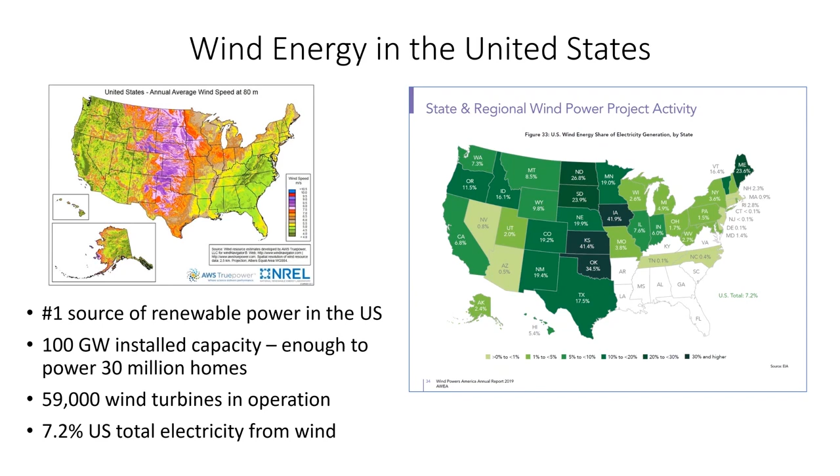The state has about 15,000 wind turbines. Again, that's a good number relative to the 60,000 that are in the country. And what is interesting is that we produce much more than the average. The average in the country is 7% electricity from wind, but this state is producing 17.5.

Something that is not well known, but is very important to mention, is that wind energy is good business for Texas. The state in particular receives almost $300 million in state and local taxes, which is a great source of revenue. And owners of land are receiving approximately $200 million in annual land lease payments from the wind projects. So bottom line is Texas is really king in wind, and if Texas were a country, it would be number 5 in the world in terms of installed capacity.

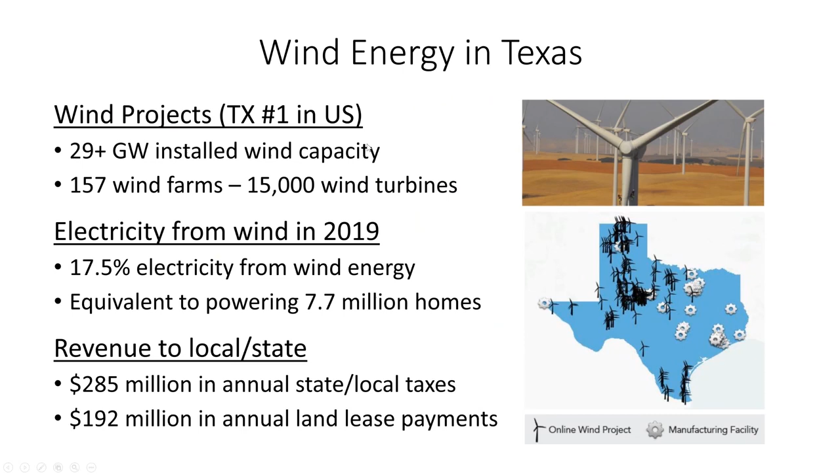So what are we doing at UTD, given the fact that we are in a state where wind is so important? Well, we have a group. We call ourselves the Center for Wind Energy at UTD, or UTD Wind, as one of my colleagues once suggested. And the goal of the work we do is very simple. The name of the game in research and development to support the growth of the wind industry is costs. The United States wants to get to 400 gigawatts, so 4 times what we have today, by 2030, with penetration levels of 30% or even more in the electric grid. So to do that, we need to continue working in order to lower the cost of wind energy.

And we do 2 things. We do research that is transformational, where we're trying to discover new concepts for the production of wind, the transmission of wind, the interaction of wind with the environment, and research that is more translational or applied research, where we take ideas that have been tried elsewhere or are known to be good, and we apply them to wind because they have not been applied before.

In terms of our mission, we want to put people together. The more the merrier. So we want to connect researchers in industry, in universities, with students in order to enable our activity. An important part: we are a university, so students are central to our mission, and we want to train the next generation of wind energy innovators. And everything requires collaboration. And collaboration also requires funding. So we want to establish private-public partnerships in order to enable our work.

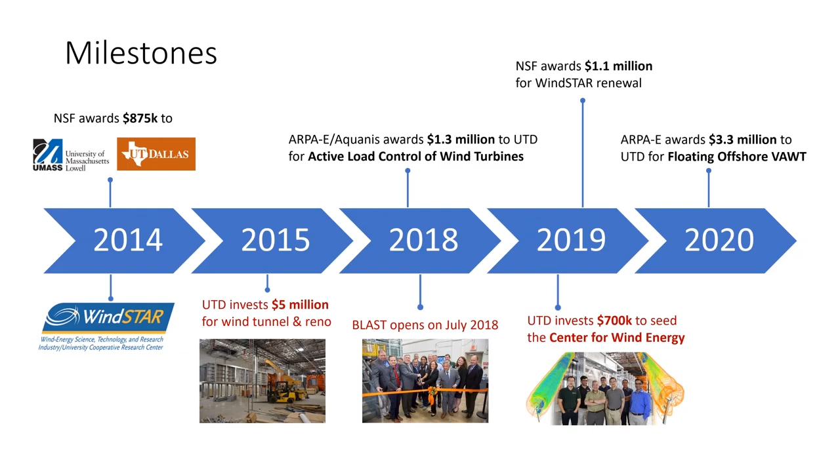The mission is to conduct research of significance and relevance to the wind power industry and produce their workforce at all levels. Leaders that could come with new innovations and contributors that can take some of the research that we do in WindSTAR to their companies. The entire concept of these centers is NSF gives us money for operations. That's why the grants from NSF are not huge. And then we are supposed to raise the funding for conducting projects from the member companies.

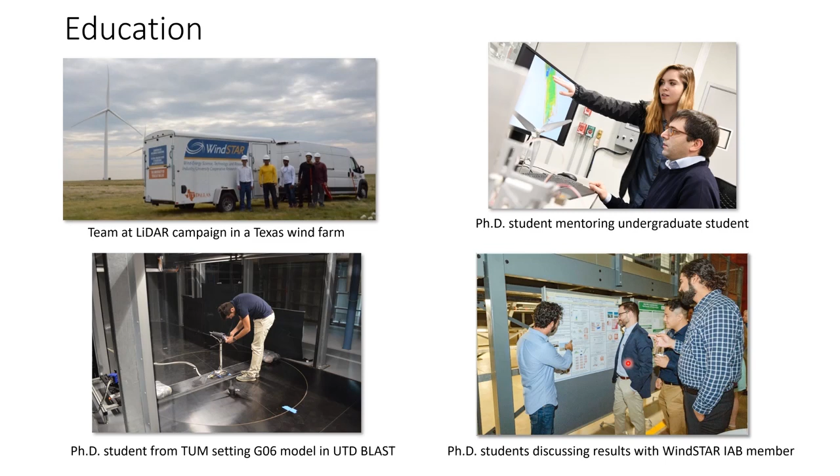On the bottom left, there is a student from the Technical University of Munich who came to our wind tunnel. This is his small wind turbine, the G06, and he came here to do some testing. On the right-hand side, you see interactions between graduate students and members of industry in our industry advisory board for WindSTAR talking to one another.

So facilities, what do we have? I mentioned the wind tunnel, and I again acknowledge the vision and support of David Daniel and Mark Spong to get this off the ground. It's phenomenal - there's only one wind tunnel like this, with a very long test section to create at scale the real conditions for the flow that wind farms see.

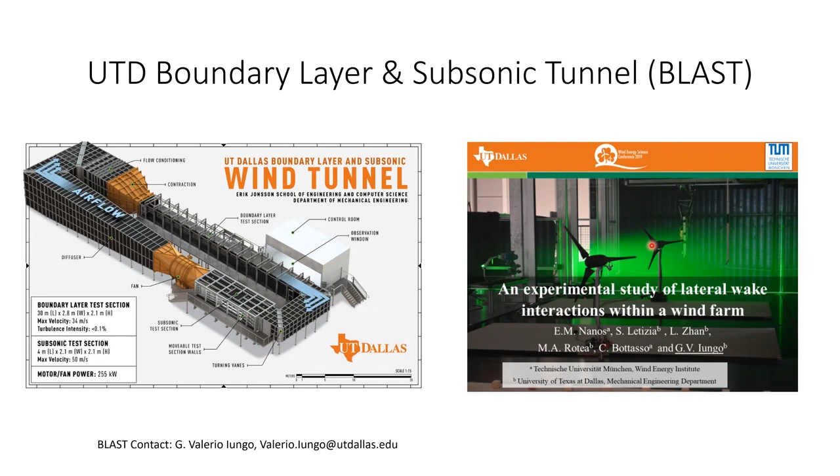On the right, you see the two turbines from Technical University of Munich with the first paper, I believe, that we did with them, making measurements of their wakes and their power production in BLAST. If you want to know more about this wind tunnel, you should contact Dr. Iungo.

And from there, diagnostics on the ability of a wind farm to produce power. Okay, so I've given you an overview of the center, facilities, people, and motivation for what we do, and some of you I know are students in this audience. So how about the research? Well, I'm going to pick a topic that I know, which is control of wind turbines, and describe some of the work that we have done in this area.

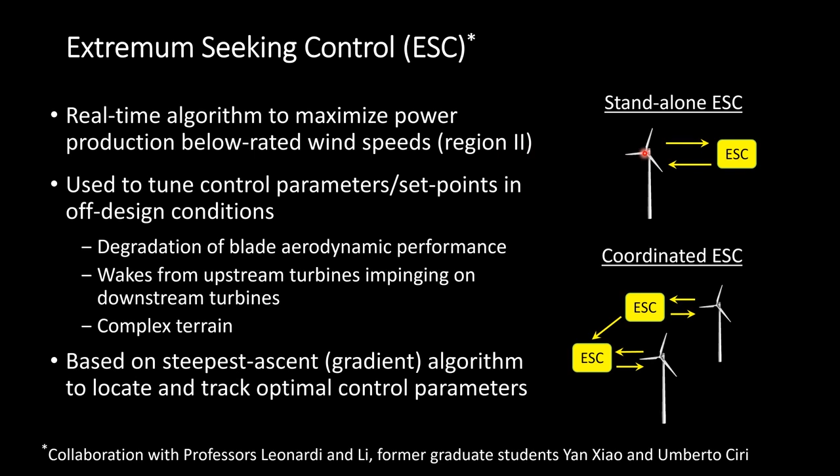This topic is extremum seeking control. Extremum seeking control is essentially an algorithm used to maximize power production in a particular region of operation of a wind turbine. It's called region 2. Region 2 is the wind speed range where the generator is running at an RPM and rotor speed that is not exceeding its rated value. How do we use this algorithm?

Well, it can be used in two modes. It can be used for a single wind turbine, or it can be used for a wind farm if we allow coordination of the different controllers for the different turbines. And what it does is continuously retune the machine so that it operates at its peak performance, and continuously retune a wind farm so that the turbines don't fight each other for the wind, but cooperate and collaborate in order to maximize the power they can extract together.

And here in the middle, you see some of the reasons why this may be needed. This is a simple algorithm. It's based on, if you know any optimization, the steepest ascent, the gradient algorithm, to find an optimal set of parameters.

If you don't know optimization, but you have done hiking: if you want to get to the top of the hill, you have to climb up. When you're at the top, if you want to go down, you have to climb down. So there is a slope up, slope down. When you're at the top, the slope is zero. So that's what extremum seeking does. It takes you to whatever peak value your power has for the particular conditions.

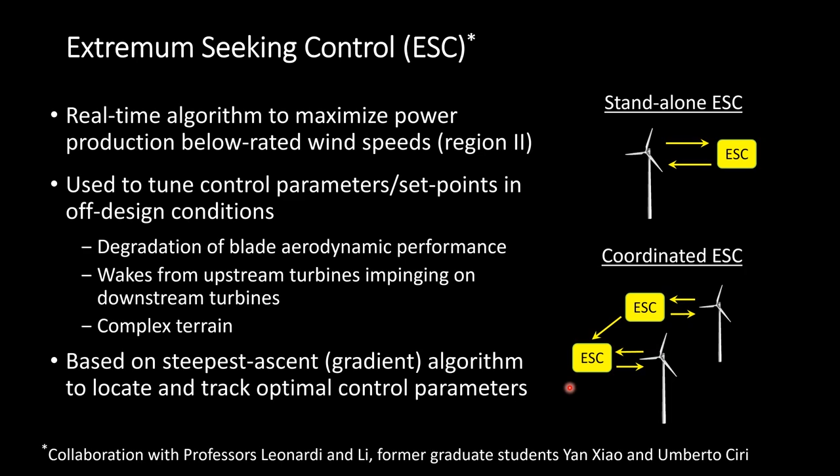So before I start with any controls, let's talk about how turbines operate. Basically, a wind turbine produces power when the wind is sufficiently high - we call that the cut-in speed - to move this massive rotor. Here you see a GE 3.6 megawatt machine in comparison to a Boeing 747. So you need enough energy in the wind to start the rotor.

And then if the wind is too high and you apply it to the rotor, you will lose it, so you shut down the machine. So you produce power between the cut-in and the cut-out wind speed. And the way power is produced in this region depends on how much wind you have.

There is a critical speed that we call the V-rated, the rated wind speed. At that speed and beyond, the power output is constant, and this is the rated power of the generator. You know, you buy a generator that is a 3.6 megawatt generator, the rated power is 3.6 megawatt. You buy one that is 2 megawatt, the rated power is 2 megawatts.

But below rated is where you depend a lot on the aerodynamics of the machine and where you want to maximize efficiency. So what is the power extracted by this machine when the speed of the wind is below rated conditions? Well, that power is essentially proportional to the power available in the wind. The proportionality factor is the efficiency, the aerodynamic efficiency of the machine. There's also an efficiency for the generator, but I'm going to just focus on the aerodynamic efficiency of the rotor.

So how is that done in a real machine? Well, in region 2, the machine is controlled by controlling the speed of the rotor. And the speed here, in the wind power community, we use this nomenclature that we call the tip speed ratio. Essentially, the tip speed ratio is the linear velocity of the tip of a blade - the angular velocity of the rotor times the length of the blade, the radius of the rotor - divided by the incoming wind speed V perpendicular to the rotor. We call that number lambda, and that's the tip speed ratio.

And now if you were to plot, for a typical turbine, the efficiency - the aerodynamic efficiency or the power coefficient of the machine - as a function of the tip speed ratio, you get this.

If the tip-speed ratio is very low, there is no power. If it's very high, there is also no power. There is a sweet spot. If you operate at that tip-speed ratio, you maximize your efficiency and get the most power for the given wind. So the name of the game with speed control is to keep operating at this star, the optimal tip-speed ratio.

In this case, this is a 5 megawatt turbine model from the National Renewable Energy Laboratory, and it has a 0.5 CP max at about 7.5 tip-speed ratio. These machines, I don't think there is one that has efficiency bigger than 50%, and there is actually a limit called the Betz limit that no one can exceed. But I'm going to skip the theoretical part.

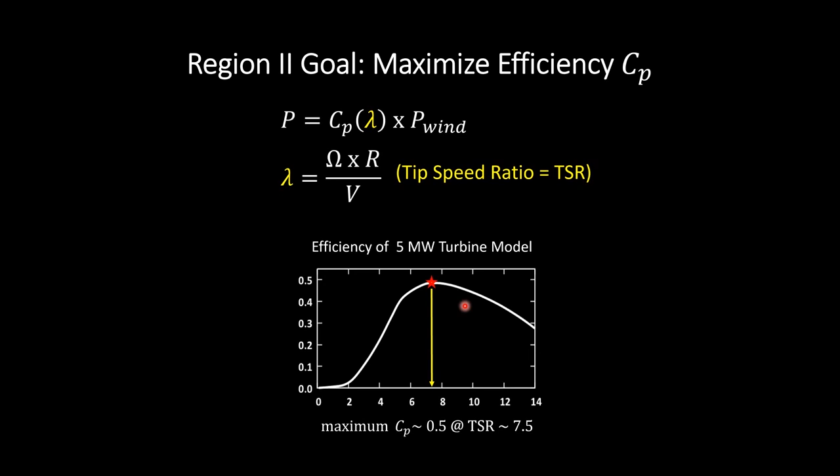So how do we control the machine to operate at the optimal tip-speed ratio? The optimal tip-speed ratio is right here at this star. On the left you see the TSR, and we said 7.5 was the optimum, and on the right is the power coefficient. I'm showing here the TSR and the power coefficient in yellow. You see that we hit the star at about 20 minutes using this basic algorithm called Extremum Seeking.

In this animation, which has the turbine and the time trace at the top, this is the turbine. When the colors are green, or darker, it's because the wind speed is low. When it's red, the wind speed is high. So we start accelerating the machine, and the wind speed behind it keeps decreasing, but the machine starts making more power.

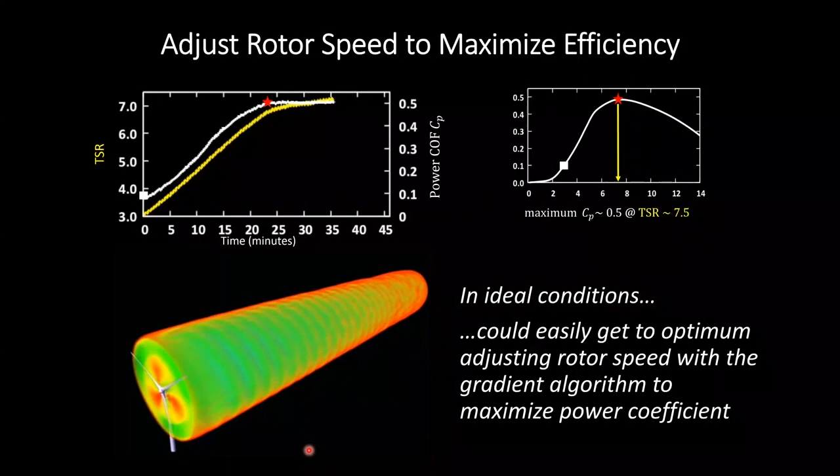So using Extremum Seeking under very ideal assumptions is quite easy. If we can adjust the rotor speed instantaneously and measure the power, with no turbulence, no noise in our measurement, no changes in wind direction, then this problem is easy to solve. But the reality is different.

And the reality does not allow us to control speed instantaneously. In your cars, you cannot change from 20 miles per hour to 60 miles per hour in no time. You need a force, a powertrain, a force actuator in order to achieve that. And here, what is used is the generator torque. The generator that is capturing power from the rotor and putting it into the grid requires a torque, and the reaction torque of the generator is applied to the rotor, acting as a sort of brake.

You can imagine a bicycle. You are at the top of the hill with brakes on the bicycle. You start speeding up, you want to reduce your speed, so you start touching the brakes. That's a reaction force that is slowing you down. So you can think of the generator torque as braking a bicycle.

It turns out that in order to operate at this point, at this optimal CP and given optimal TSR, you have to choose the generator torque as an appropriate function of the generator speed, the rotational speed omega g. That function is essentially a constant times the square of the generator speed. It could get more complicated than this, but this is the beginning.

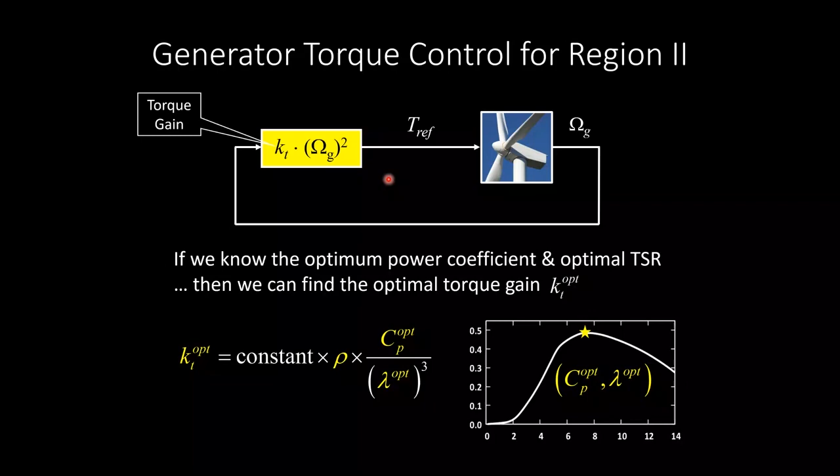So let's take a look at what could happen for a real wind turbine. You buy a wind turbine today, you put it in the field, and they are supposed to last 20 years. You go 2 years after you install it, maybe a year after installing it in Texas, and you start seeing that the blade has these insects, these bugs.

These bugs change the aerodynamic efficiency of the blade. You put wind turbines in Canada or in the northern plains in Minnesota, and you start seeing this: that's ice on the blades. That changes the aerodynamics. And if things are really bad, you could get erosion of the leading edge, and you basically have a blade that needs to be repaired.

But what do all these things do to your ability to extract power, essentially the aerodynamic efficiency called the power coefficient? So this is the operating point, you can think of it as the tip-speed ratio, though it could be some other parameter. You buy a new machine and operate on the blue curve. The manufacturer not only gives you a high value for your CP max, but also a flat curve, so that if your operating point changes a little to the left or right, you are still near optimal aerodynamic efficiency.

The problem is that for a new machine, when these effects take hold, this curve could become the curve in red. And if that were to happen, your optimum goes down, but not only does the optimum go down, the curve may get a lot sharper. So if you continue to operate here because you didn't know these changes took place, then instead of producing this amount of power, you'd be producing less.

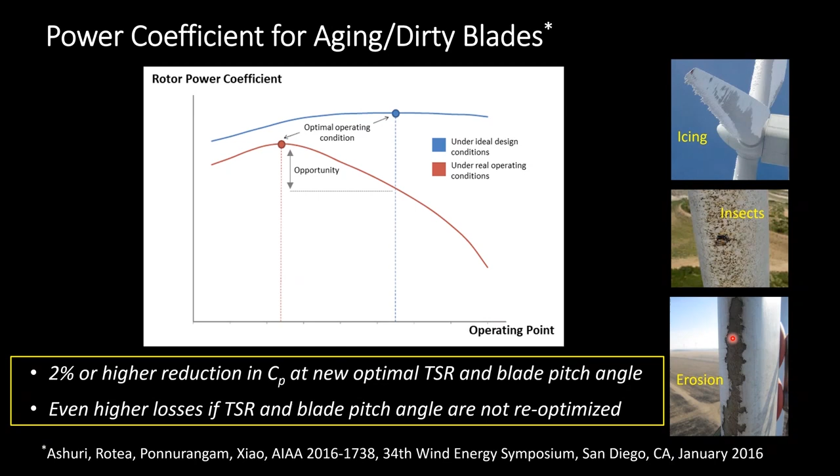In some cases, adjusting just the TSR is not enough. You may need to adjust also the so-called pitch angle, which is the angle the blade makes relative to the wind impinging on that aerodynamic surface. So bottom line is, if things change and you don't change your software, you're going to lose power and you're going to lose money. Our value proposition is: what changes can we do with software before things get so bad that you really need a hardware repair. Our answer is what we call extremum seeking control, where we make measurements of the rotor power,

then go through an algorithm that I'm not going to get into the details of. That algorithm can adjust two of the main parameters that control the aerodynamic efficiency of the blade: the torque gain KT that I mentioned earlier, and the blade pitch angle. The algorithm has some good properties—it doesn't require a lot of information to set up. In terms of measurement, we don't need to measure the wind. That's a big thing, because measuring the wind is not easy unless you're willing to pay a lot of money and get a LiDAR on the machine. This algorithm can be used to control the torque gain, the pitch angle, or both together.

I need to start accelerating here. So we did an implementation of this on an experimental machine owned by DOE at the National Renewable Energy Laboratory. It's called CART3, shown here. This is a 600-700 kilowatt machine, fully instrumented in order to do control studies.

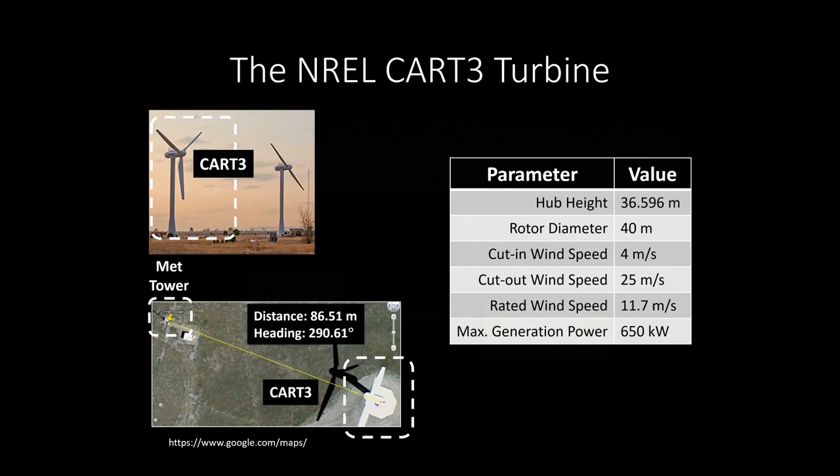And when we did the test, we applied our algorithm to a baseline controller that was set. This machine has an optimal CP, calculated under a number of assumptions, of 0.47. We started with a controller that the machine had, producing an approximation of the power coefficient—essentially the power produced by the turbine divided by the power available in the wind—that was 0.38. Then we let that machine run, we applied our ESC, and we increased the power coefficient, the estimated power coefficient, to 0.42. So that's a 12% improvement.

We did the same for the pitch angle, which is the angle these blades make relative to the wind. We took it from a baseline of 0.32 to 0.35, which is an 8% improvement. The difference in improvement had to do with several factors, one of them being that the torque gain experiment was done in the summer—no ice, nothing funny on the blades, maybe some bugs but not that many. In the winter, there was some ice on the blades, which changed the aerodynamic properties. So we published this work.

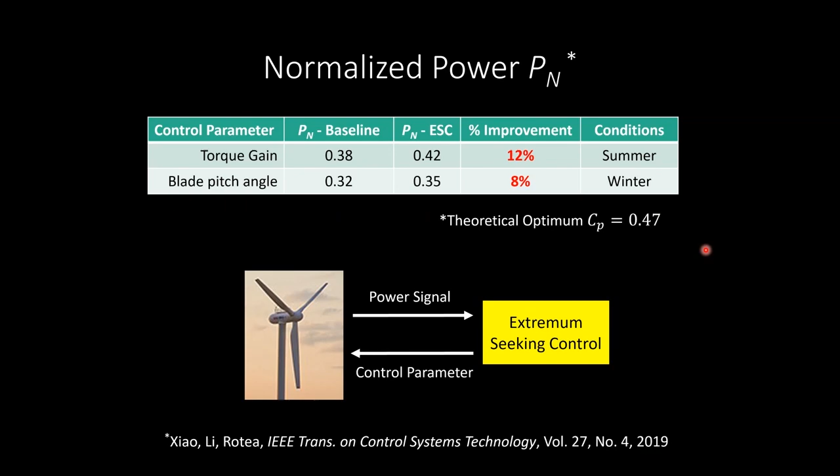In terms of improvement and impact, we have learned that ESC can improve power production. This experiment had a limited amount of data, and with the data we had, we were able to do some statistics, and we can say with 90% confidence that our improvement is going to be at least 3 to 4%. We may not get 8, we may not get 12, but we should have some confidence that we can get at least 3. Of course, more testing is needed, but these results were encouraging.

And why is this important? Well, we talked to people in industry. These numbers are a little dated now, they could have changed, but we were told by members of the Industrial Advisory Board of our center that a 1% increase in annual energy production for a wind turbine could translate into an increase of revenue between $3,000 and $5,000 per year per machine.

So if you take these numbers, you assume a 2% increase in AEP by applying this ESC, and you do this as a retrofit to roughly 20% of the 60,000 turbines in the country, you're going to have an extra revenue between $72 million and $120 million. So that is very promising, very encouraging, and we should do this algorithm more and more.

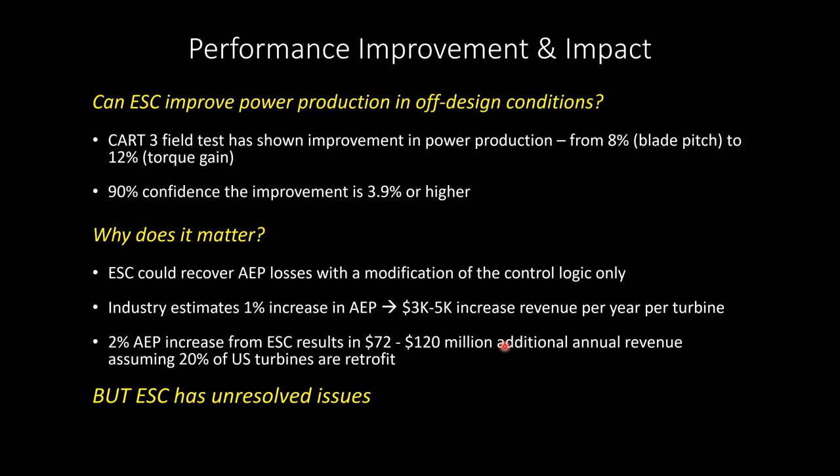But unless we get into some details of how extremum seeking control works, we may not be able to realize this benefit. There are some unresolved issues. So we continue the work, and I will try to be very quick on this. I said earlier that extremum seeking control aims at taking you to the peak, the hill, the top of the power curve, of the power coefficient curve.

So essentially, you know that you are at the top when the slope is 0. You neither tilt to the right nor to the left. You don't tilt. So the extremum seeking control is essentially using a measurement of power to take it to the point where the slope of the power relative to the control parameter, that's your hill climbing mechanism, and it could be the tip speed, the torque gain, or the blade pitch. So the derivative, which is the slope relative to that control parameter, needs to go to 0.

If you hit 0 with that, then you know that you are at the peak, because this function is a unimodal function of the parameter that we are using to control it, be it the torque gain or the blade pitch. But when you do an analysis and you look at the power that comes out of the turbine as a function of the control parameter, let's say the torque gain, and the wind speed, I said that the power is proportional to the power available in the wind times the efficiency. The power available in the wind depends on the cube of the wind velocity.

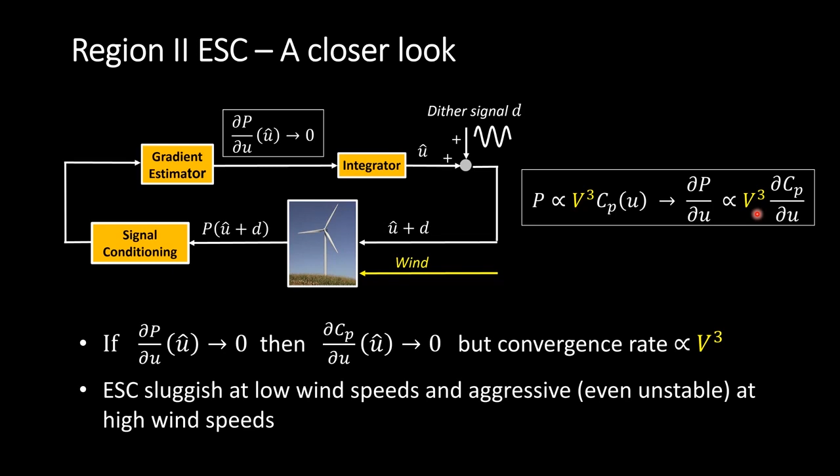So a few years ago, I asked the question, is there a measurement or a transformation of the power signal that I can find that if I maximize that new function, I'm also maximizing power, but the derivative of that function with respect to the control parameter is independent of P wind. And the answer is yes, that transformation exists and it's the logarithm. If you take the logarithm of this product, then you have the sum of the logarithms.

If you calculate the derivative of this logarithm with respect to the control parameter, this term completely drops, and you are essentially proportional to the power coefficient. So if you could actually take the derivative of the logarithm with respect to the control parameter, you are essentially maximizing the power coefficient. This was a very nice theoretical observation, which is also very simple.

So then we apply this gradient to the gradient ascent algorithm that says, adjust the derivative of the control parameter with respect to time proportional to the gradient that you measure, so that when you are in steady state, this gradient is 0 and this quantity is 0, and as a result, you are at the peak of the power curve. And the transient response of this loop does not have the wind speed in it, and as a result, is completely insensitive to that.

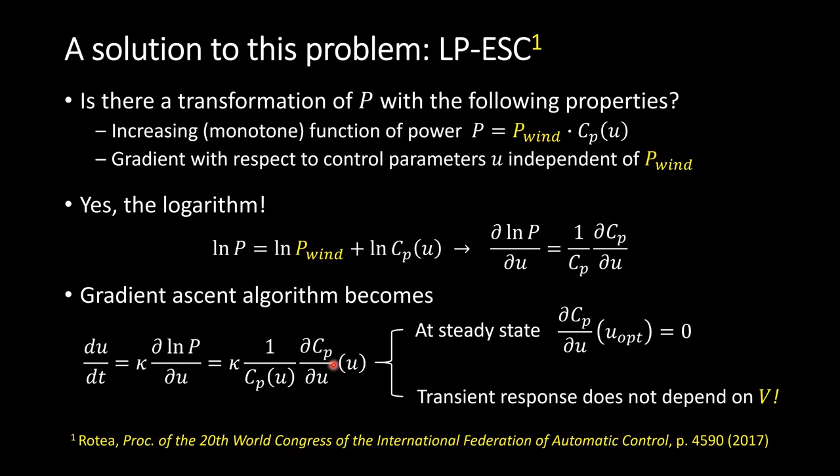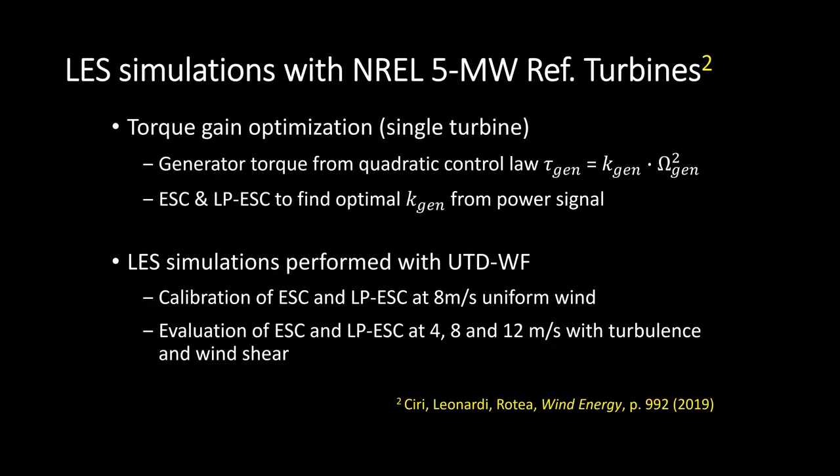So then I got together with Professor Leonardi and a former student, Umberto Ciri, and we did some simulations that they know how to do using the high fidelity large eddy simulation capabilities. And we looked at how well this idea was performing relative to the baseline, or the naive ESC, I would call it. So what we did is take a model wind turbine, calibrate it at 8 meters per second wind speed, and then evaluate it at two other wind speeds, 4 and 12. Now I need to move really fast. So this is the calibration stage.

Applying two other wind speeds in region 2, a lower one of 4 meters per second and a higher one of 12, we see what I told you. At 4 meters per second, the vanilla ESC takes very long to converge. In fact, it takes quite a bit. We started with 10 minutes and now we are at 50. Okay, so 5 times longer.

And if the speed is very high, the algorithm becomes unstable. Here we're hitting 0 power, even negative power. So you cannot use this in a real machine. On the other hand, if you go to the log power ESC, the 3 time series for the 3 wind velocities are sitting one on top of each other. This shows consistency across different wind speeds, repeatability of the algorithm as calibrated, and is a very encouraging result to go to the field with something like this.

So what have we learned after doing this research? And what have we learned in today's presentation? Wind turbines have a sweet spot when they operate at peak efficiency. That sweet spot could change due to a number of factors over the lifetime of the turbine. LP-ESC is an algorithm that allows you to retune to the new sweet spot every now and then. We actually have a patent on this and are in conversation with a company to license this technology.

And the algorithm itself could be a good retrofit for aging turbines or turbines that are put in off-design conditions, such as complex terrain that was not taken into account when the machine was designed.